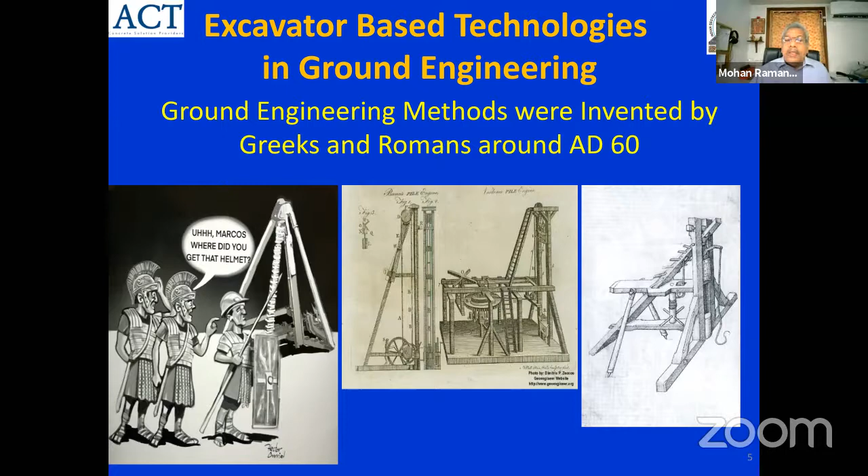You can go to Chelly's book, you can see some more pictures. So it's nothing new. What's new is the new manufacturing technology we can use to improve on this.

Now, what about India? Who are the equipment players in India? India has so many manufacturing brands, or at least representation brands, in 3 sectors. For students, earth-moving equipment is divided into 3 distinct segments, classified by the weight of the machine. One is called the mini segment, which includes mini excavators and skid steer loaders (SSL).

We have almost 20 manufacturers or brands working in India. Some are imported, some manufactured here. These brands are all part of today's Indian industry. Then there are backhoe loaders, generically called JCB, but the correct terminology is BHL - backhoe loader - made popular by the company JCB, though we know there are many other brands.

There are 12 brands of backhoe loaders as a choice, and at least 10 of them are manufactured in India. So India is the largest market in the world for backhoe loaders. Then come the excavators - we have so many brands of excavators in India.

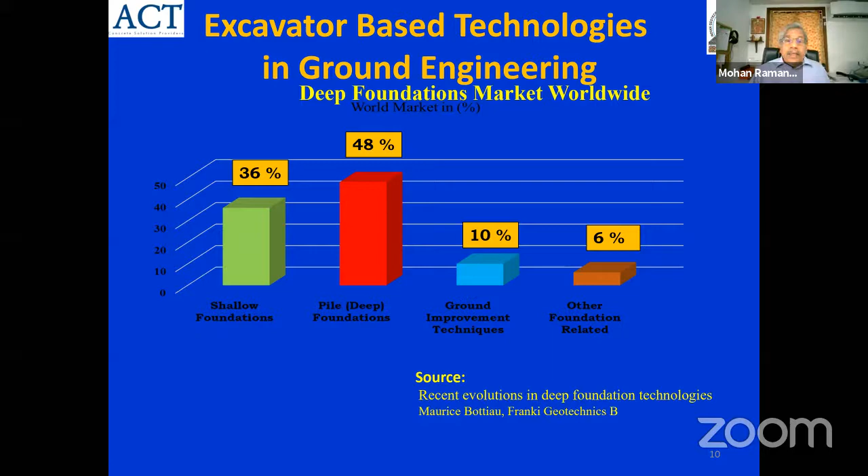This is data from a survey made by Maurice from Franki. So what about the Indian market? The Indian market in the coming years is huge. All of you know it's something like 5 trillion US dollars is going to be spent, and this is the breakup. Who's going to do it? Our contractors are going to do it.

And we need equipment - all of them start with the groundworks. There's enough jobs in the market coming up, but I don't think we have enough equipment or enough contractors. If we are not able to do it, projects will go on with or without Indian contractors and Indian equipment. This is the right time to pivot and change. This kind of data is available everywhere, and we should take advantage. The younger generation should take advantage and move into this.

Now, those of you who are not really in geotechnical engineering or soil mechanics - India is a very diverse country, and it gives us a challenge plus an opportunity to see a wide variety of soils in India. Without the basic knowledge of ground, I don't think manufacturers can succeed. So ground engineering profiles are available - we have enough knowledge in our universities and professors.

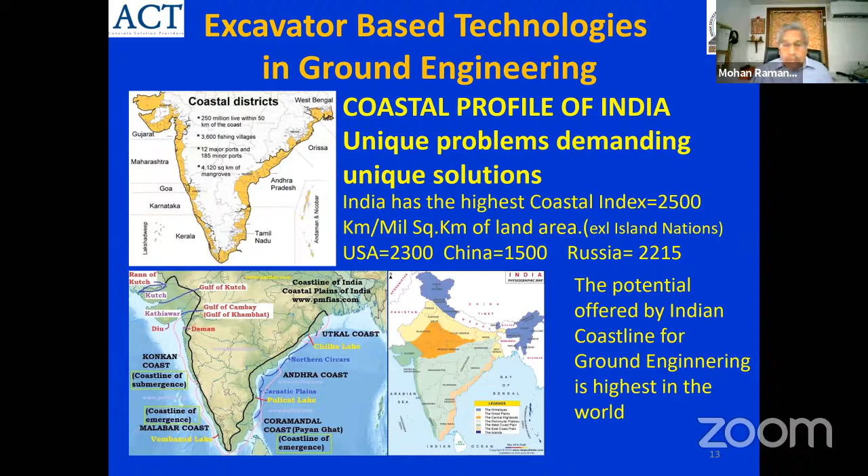So this is something unique. I thought I should bring this point, that the Indian coastal line gives us an enormous opportunity and a huge challenge. Of course, I'm not taking index small island nations like Singapore and so forth. I'm taking the large countries.

Now, with that background data, let's go into the simple to the most complicated equipment used. Pardon me for some basic knowledge, basic information, which most of you may know, but for students sponsored by the student chapter, they should know.

The most common and most prevalent use of an excavator is a bucket. A bucket is nothing but an attachment at the tip of the machine, which excavates with a downward force, and it takes the material out and loads it into a truck.

This is the most common, and excavators can range from 10 tons to 120 tons in weight. Similarly, the bucket has different capacities, maybe 5 to 6 cubic meters being the largest, and the weight depends on the density of the soil.

This is the most useful breakthrough we had about 25 years back when a company in India brought the first excavator.

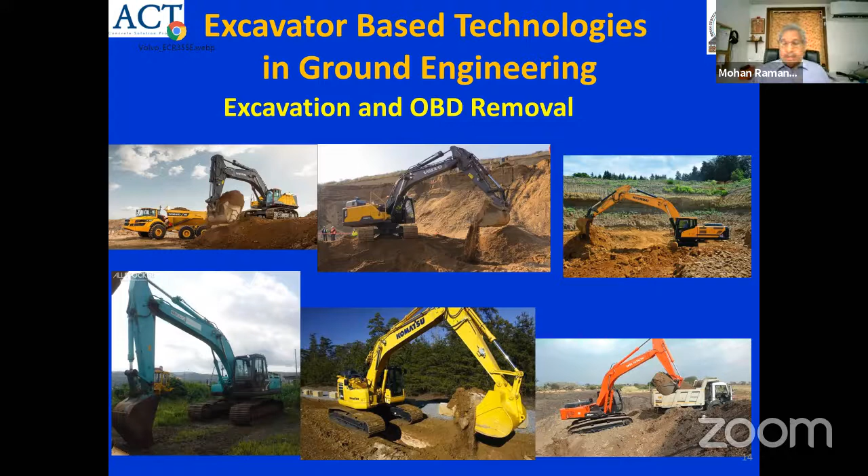Now, the same excavator is being used for different applications with a longer boom and a longer arm. This portion here is called the boom, and this portion here is called the arm.

With the longer boom and longer arm, and simple moment calculation based on the counterweight, we can arrive at the bucket size, and this is used for deeper digging. There are many applications, and these longer booms and arms are also imported, though a few companies in India are making them. It's a simple way to do it, but it's useful now for deeper excavations.

We're going for double basements, triple basements, so longer booms and longer arms have a great boom. We also have deep excavations in all our metro stations and our cities having car parks and malls. We see this kind of construction happening, and there's no way we can excavate into these pits without the excavators being lowered down.

We also use in deep excavations these kinds of small machines, 20-ton, 30-ton machines working in deep excavations. You will find them, but they get lowered through a ramp, and they're the most versatile machines.

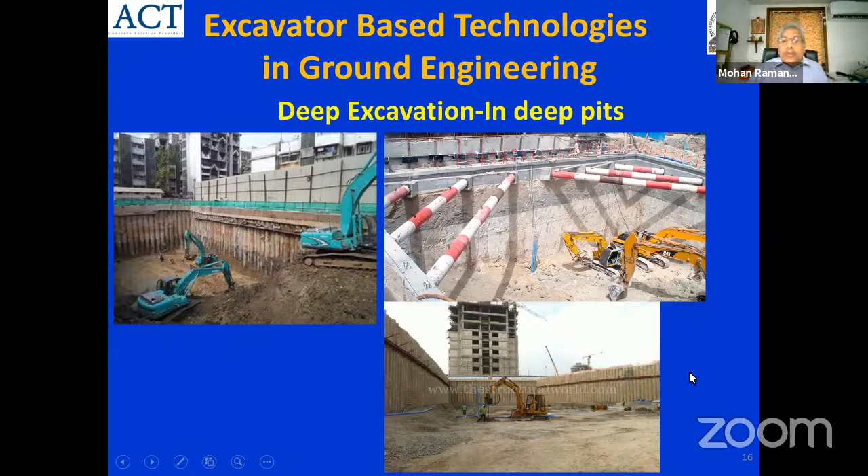Then we have another special equipment called the Tele Dipper. This Tele Dipper is now being introduced in metro stations for top-down construction. In this top-down construction, you build the top slab, leave an opening, and start excavating, going up to 30 meters or so depending on the station height, and you use this equipment for removing the muck.

These kinds of machines, all these pictures from India, the top three are pictures from India, and they are being used in metro stations. I have a short video, but I don't want to stop here because it takes some time to switch.

The video shows the operation of these machines. There is a telescopic dipper that goes inside, and there is a grab bucket which grabs the material. The telescope closes and the machine swings and brings it down.

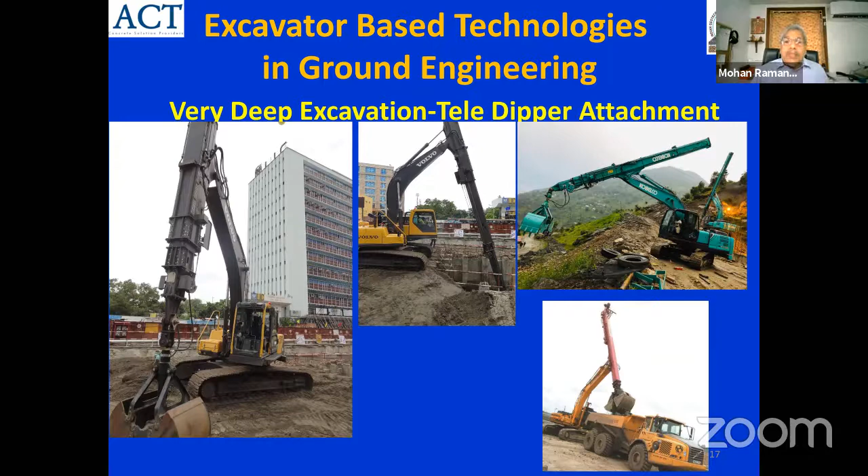This is a very simple equipment, and even this is not manufactured in India. That makes it expensive if you import and bring it to the site. But with the amount of metro work going on, these machines will find a great boom.

Then we also have simple attachments called trenching buckets. This is just the attachment. For those students, I'm talking about this kind of shaped attachment.

This shaped attachment gives the shape of canals, small drains, and ditches, which is used on the sides of roads, for agriculture, or for laying pipelines. It gives the shape and makes it easy so that you can just put a concrete lining or some sort of lining and close the ditch.

So even these simple things we don't see much in India.

Now we go to the next large chapter called ground improvement. Ground improvement comes when we have soil conditions such that your geotechnical consultant will say this is not fit because the soil is not good, so we have to do something to make it strong.

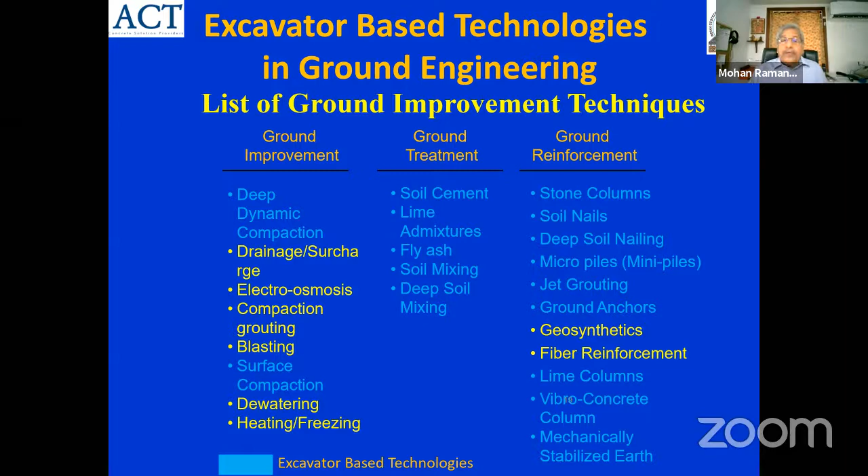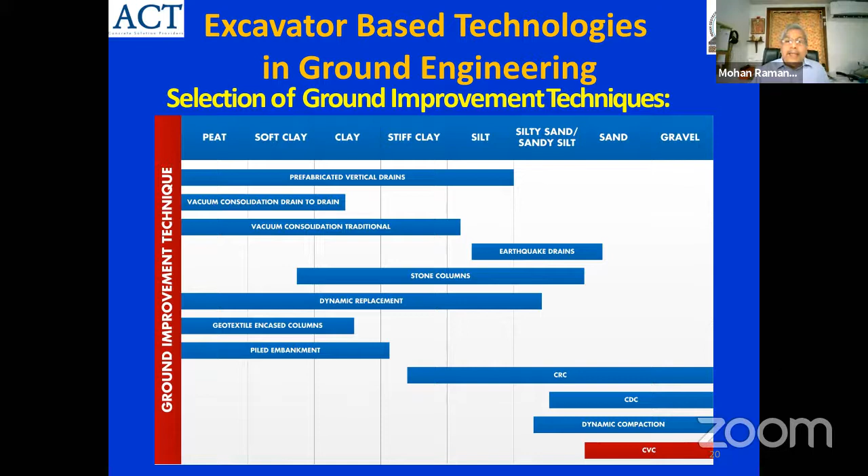This is a very famous chart, where it shows on the x-axis the types of soil by grain size, and then the various techniques and the range of techniques we can use. So this shows one technique cannot fit all. One technique, like PVD, prefabricated vertical drains, which is very popular for consolidation of soft clays, cannot be used when the particle size becomes large. There are other techniques you can look at. This is just a chart for the students and a guide for field contractors.

So if you put earthquake into this and ask which are the liquefaction potential areas, the most liquefiable soils come in the range between 1 mm and 0.001 mm, and it's sand and gravel. Also the moisture content, which is not shown here. So we also need to look at liquefaction potential and treat the soils accordingly.

More than 60% of the landmass in India has been declared as earthquake prone. The latest codes and microzonation happening say that more than 60% of the landmass in India is prone to earthquake. So we must take cognizance of this when we design for the future.

Now we come to the next simple attachments, how we do compaction. These are compaction using attachments like plates - we don't see this at all in our daily life. These are simple hydraulic plates, vibratory plates attached to an excavator. They work by taking the hydraulics from the base. Each excavator is called a hydraulic excavator, which has a hydraulic pump, and a separate line is brought into here and fitted onto this. There are a few manufacturers of this in India, but we need to make sure this is easily available - maybe a good rental company can do this.

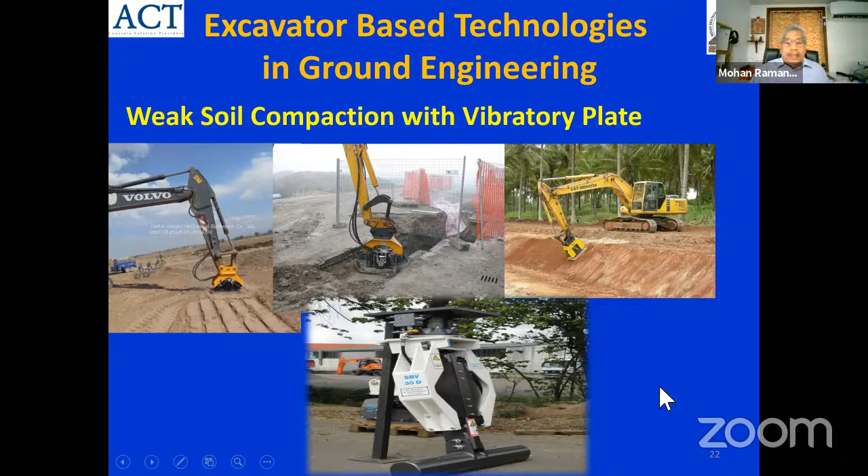We also have the same concept but as a roller - we can attach a vibratory roller. All of you have seen a roller on the road during road construction. If you drive through our highways you'll find the soil compactor and asphalt compactor, which is also a vibratory machine. But the same concept can be used on sloped canals. This has been used extensively in Gujarat during the Narmada Canal, but not very popular in other parts of India. These are very simple vibratory attachments made by Indian companies. There is a lot of innovation that can be done, and we are capable of doing it.

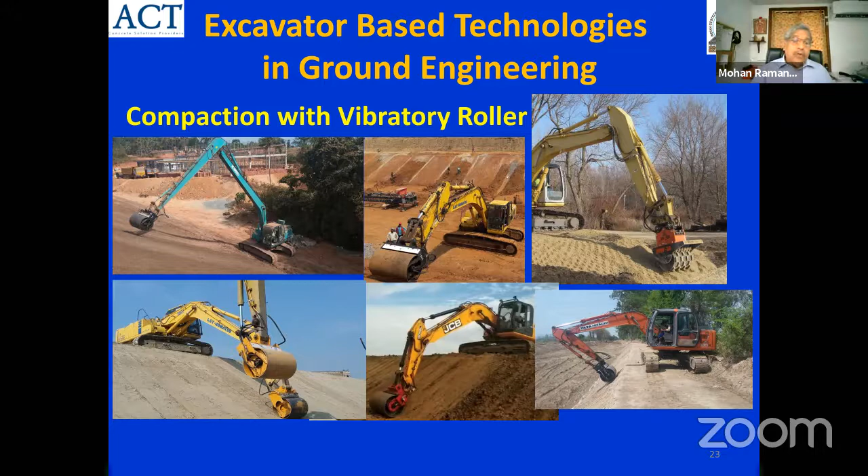These are used for compacting slopes - otherwise how would you compact the slope? Alternate methods are very cumbersome, and this is probably the fastest and cheapest method for slope compaction. As you all know, we've seen so many canals built by our government where the sides are not compacted - there is slope failure and the lining slips. We see this every day shown on newspapers. So it's very simple, and we should get into at least specifying this for our canals and ponds by using vibratory rollers.

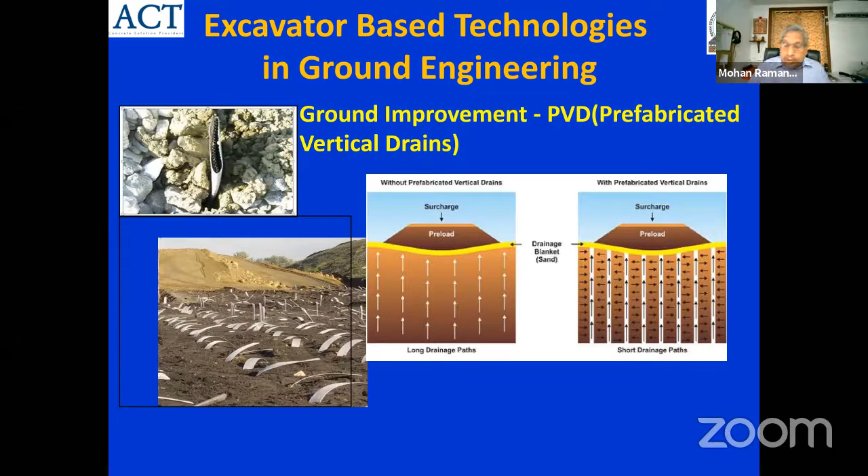It's a slow process. It's being used in large airfields and large areas where the area is very large. PVD is very commonly used in India and other places. So the PVD is explained more here.

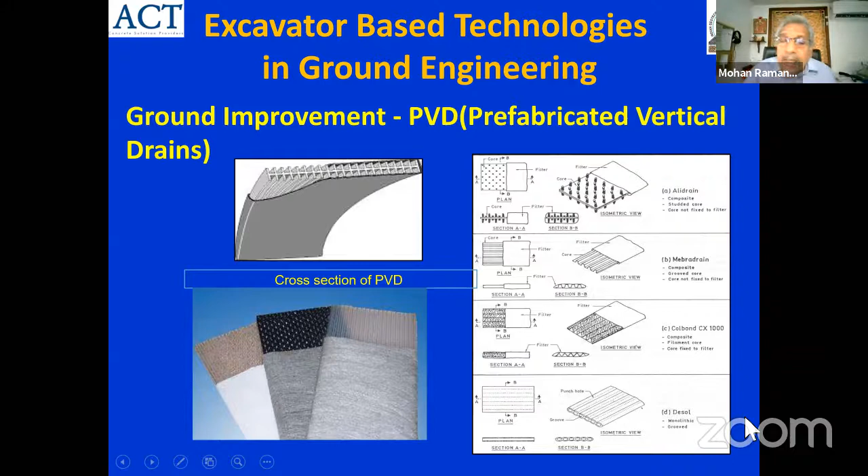It is just a cross section of a small band, which is about 100 or 150 mm wide. It has got a geotextile outside, and then it has got a pathway for water to come up. So it's a very simple system, but installed by machines like this.

As you realize, these are systems that are conceived in research institutes and laboratories, but out in the field you need equipment. Without the equipment, these technologies will stay in the universities.

The next method is Vibro flotation. Again, a ground improvement method is to introduce a vibrator - imagine a long vibrator, like a concrete vibrator. It's a long needle pushed into the ground - by itself it sinks, or with the assistance of water jetting - and then it is backfilled with a granular material like stones, or stones and boulders, or maybe 40mm to 100mm broken stone filled inside. This technique has been around in India for the last 25 years at least. We also have design methods for all of them.

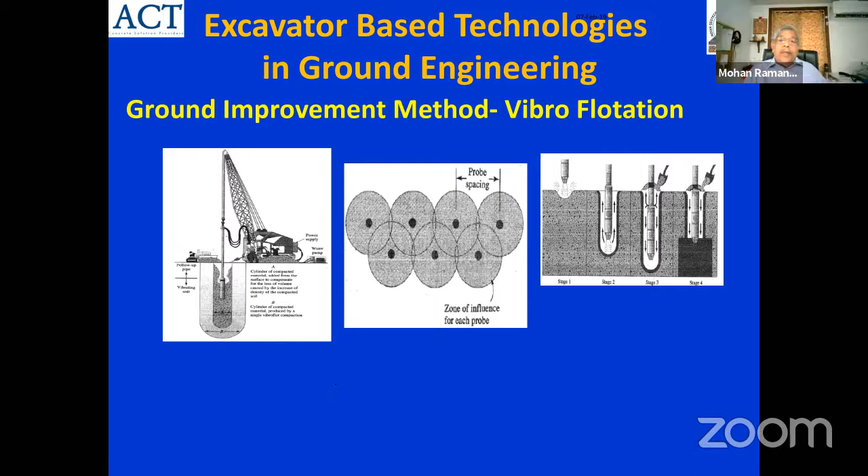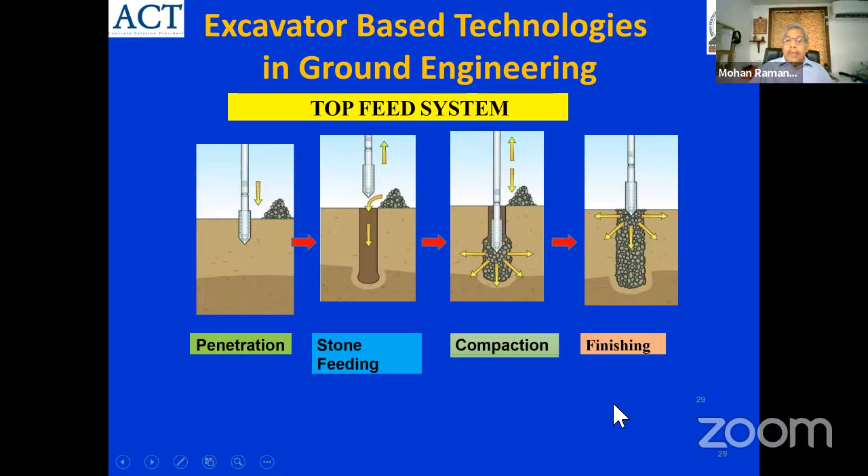You have two systems - one is the top feed, the other is the bottom feed. Top feed is where the material is kept on the side, the vibrator is pushed inside, and the material goes in there. There are a lot of seminars and webinars going on about the theory of this, but I'm just explaining the simple way how the stones are replacing the weak soils. It involves a hydraulic vibrator. The bottom feed uses the same system, similar concept, but you feed it from the bottom.

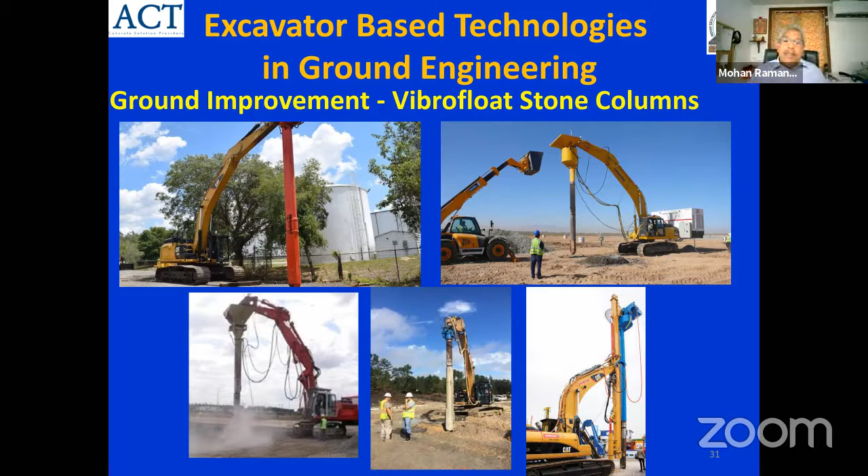There has been a lot of innovation in the same techniques in Western countries. This is a system from a company, Geopier, from the Western world. I borrowed these pictures, and you can see they combine the hammering instead of vibro. They use a hammer technology.

You hammer the pile and make the surroundings like a driven pile, and then fill it back with aggregates and so forth. They have a patented system of rammed aggregate. So for hard topsoil, it's augured, then hammered, and then backfilled with granular material. All these variations are smaller stone columns.

And where do you use them? You can use them in so many locations in India, and very aptly. It's also being used to strengthen railways.

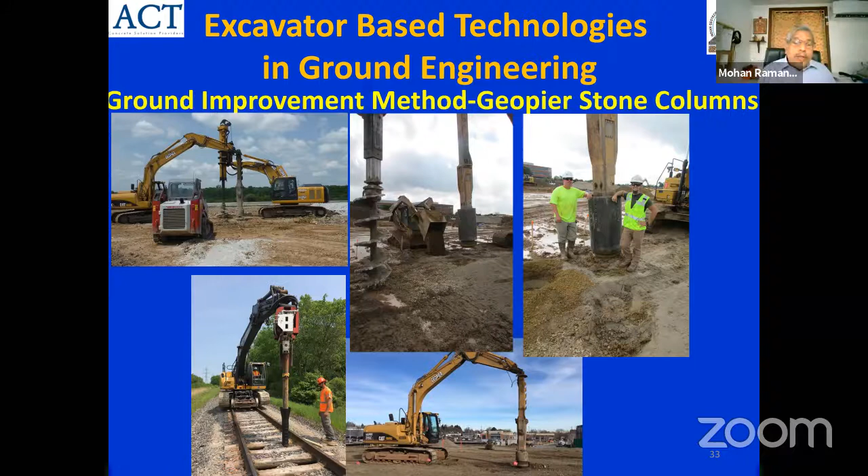For railways, this is a picture from Germany, where between the sleepers they are doing the same stone columns, the Geopier columns.

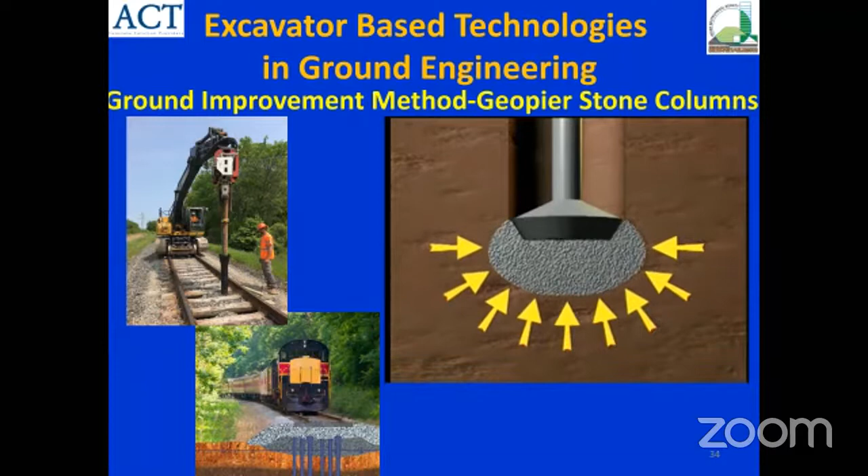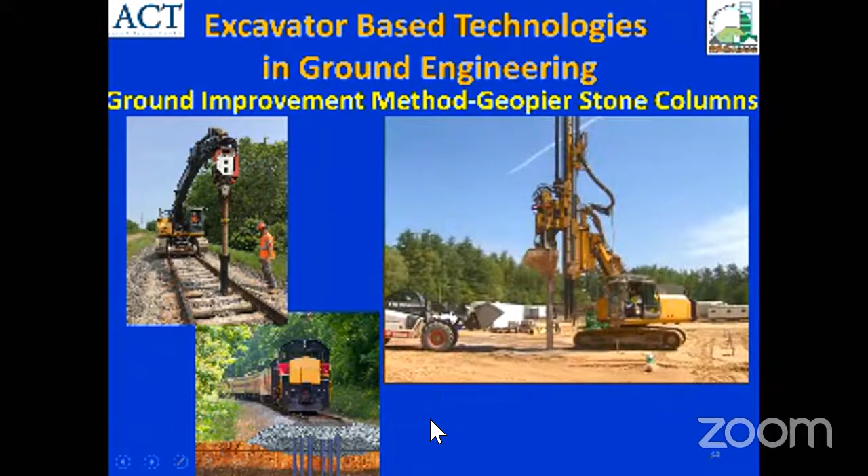This pre-stresses and pre-strains the aggregate at the bottom of the cavity while forming a bottom bulb. Then, thin lifts are incrementally placed and rammed until the pier is constructed. The result is superior strength and stiffness. For sites with soils that are unstable during drilling or with soils that are contaminated, Geopier Foundation Company has developed the Impact System, another proprietary and patented rammed aggregate pier method. The Impact System is cost-effective for installations in soils subject to caving, like saturated sand. The key to... I will stop here.

Just to give you an idea of that, these all use a hydraulic hammer. This hydraulic hammer is the same hammer that we call a hydraulic breaker. We sell close to 5,000 of these units every year in India itself, but it goes to a different type of segment. The same hammer is used in the geotechnical field.

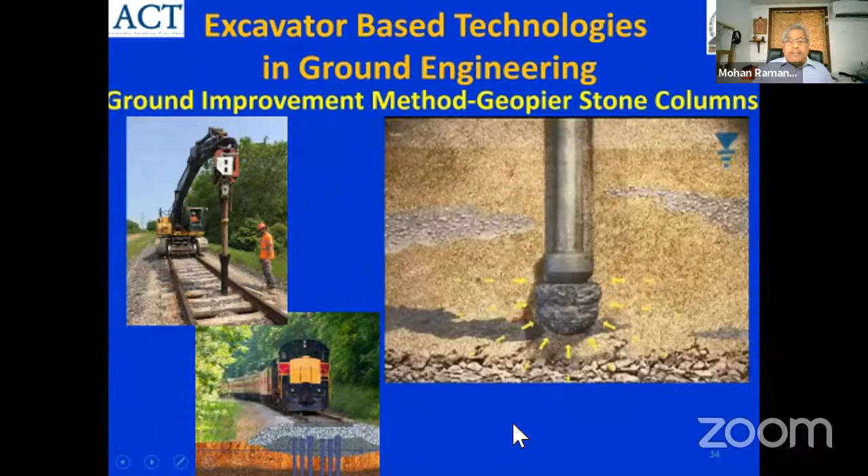So what you see on the left here is the strengthening with stone columns of an existing railway line. So it is only for the designers to innovate.

Here I borrowed this from Huesker, Germany. These slides, this is also ground improvement. They call it the Ring Trac geotextile encased stone columns. So this is exactly the same as what I told you earlier, but the whole thing is encased in a sock type of material, if I may.

So a geotextile tube, a tube of this size, large size, is installed by machines. It is drilled, vibrated into the ground by a vibrator, a pipe with a closed end, and then the sock or geotextile tube is introduced, filled with sand, and withdrawn. This is for extremely soft clays.

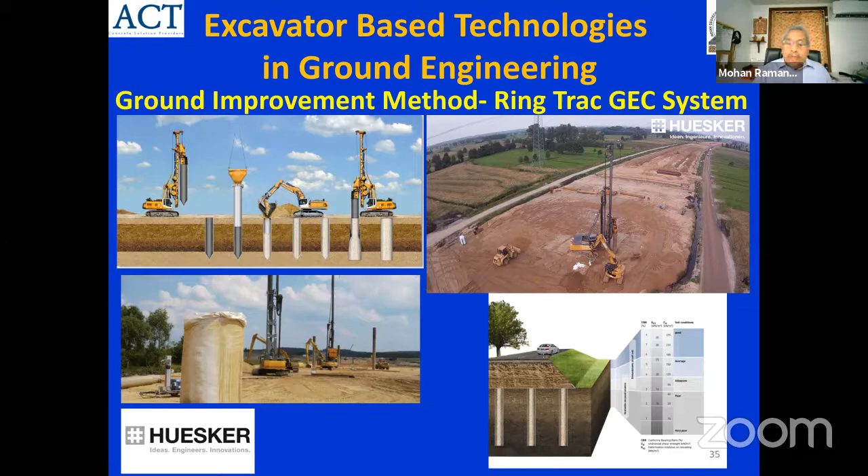I acknowledge the slides from Huesker, and these are extremely soft clays that are very, very soft. You can see the unconfined strengths are extremely low on the right side. This is another system being used for, and can be used in, very soft soils. This is the Huesker method where, as I told you, a tube with the bottom closed is vibrated in with a vibratory hammer, and once it reaches the ground level, it is filled with a sock type of geotextile tube and filled with sand.

The next method is shallow soil mixing. Soil mixing is another method of ground improvement where clays or weak soils can be strengthened by addition of a suitable third material—it could be cement, lime, specialized chemicals, and so forth. This has gained a lot of importance in the world, and deep soil mixing and shallow soil mixing are being used for treating soils which are weak and would have originally been rejected as a favorable site.

How can they be used? They can be used in blocks or grids, or made into walls for temporary excavation, or load-bearing columns. Today we have standards which can be adopted, and the Western world has started using this, but in India we don't see much of it. The same methodology and principles can be used for contaminated soils.

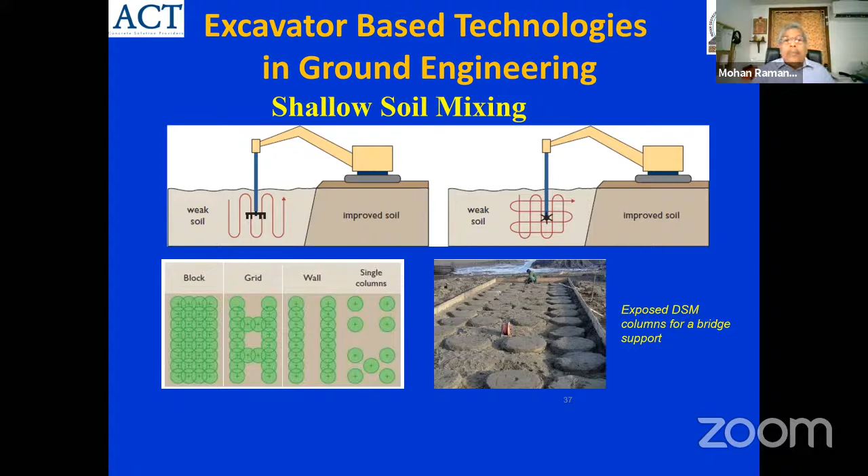So for shallow soil mixing, use an excavator. The whole mass is mixed—it can be mixed dry or wet. It's a very cost-effective solution. When I say shallow, we can go up to 3 to 5 meters, or 5 to 7 meters. Then we go to deep mixing.

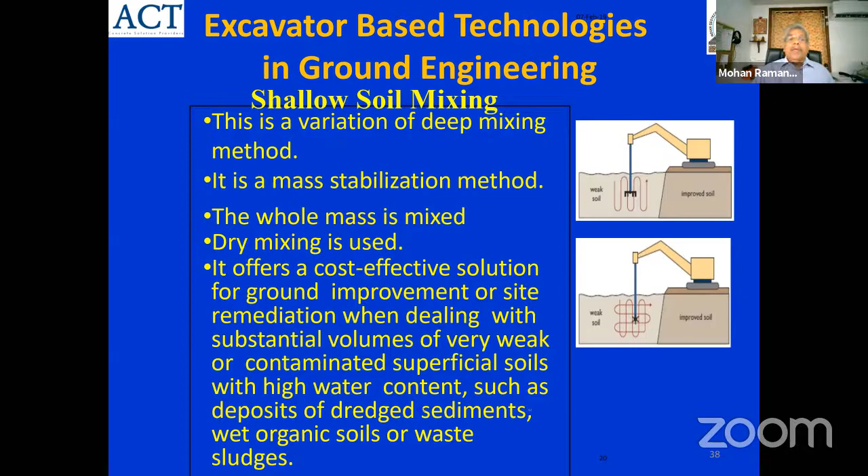Shallow soil mixing is made with excavators, and you have a plant which can pump from the bottom down, with special mixing methods. One of the easiest ways to mix the chemicals or cement is using excavator-based drum cutters. These drum cutters use a special type of blade for proper mixing below the ground. So here's a short video.

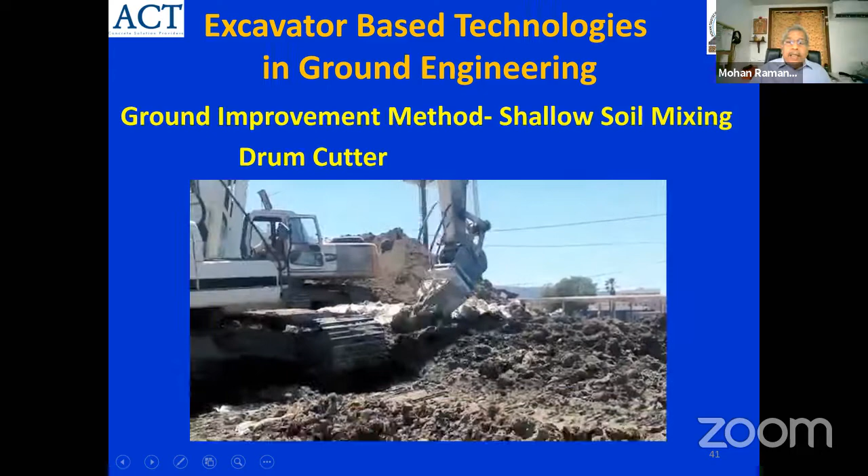You see here the shallow mixing—the machine is used with an attachment called a drum cutter, and then the whole area is rolled with a vibratory compactor.

You can also go for specialized systems. There's a company called Allu in Finland with a system called specialized mixing—they have a whole train of pressurized dry mixing. The question is, if you change the moisture content of already soft clays, you're weakening the soil. So this company has dry mixing with a pressurized chamber, and the mix is pushed into the ground.

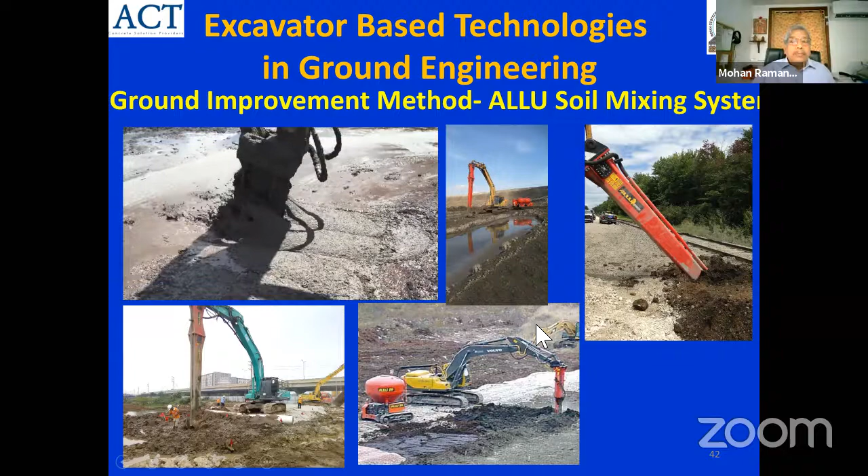As you can see, this is being done even under railway lines, on a working railway line. This is very, very common in Europe, not popular in India, but soil mixing is going to be a future of India.

Next is deep soil mixing. So we talked about shallow soil mixing—now for deep mixing, again excavator-based machines are used. These excavators are slightly modified for stability from a standard machine. When we say deep, we don't go very deep—there are specialized machines for that. We can go up to 20 meters with the standard machines.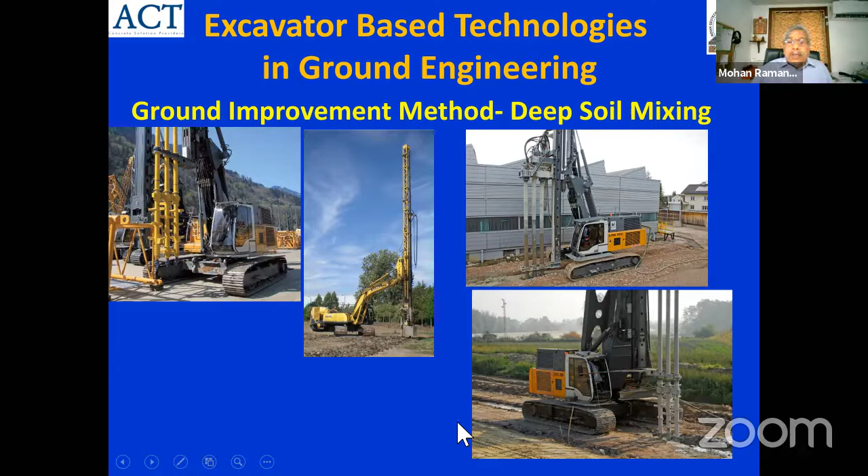We have this kind of mixing probe where it's hydraulically pushed into the ground, with mixing paddles, ejector and holes, and the slurry is pumped inside. There are so many applications of this: temporary walls, strengthening of soils, and so forth.

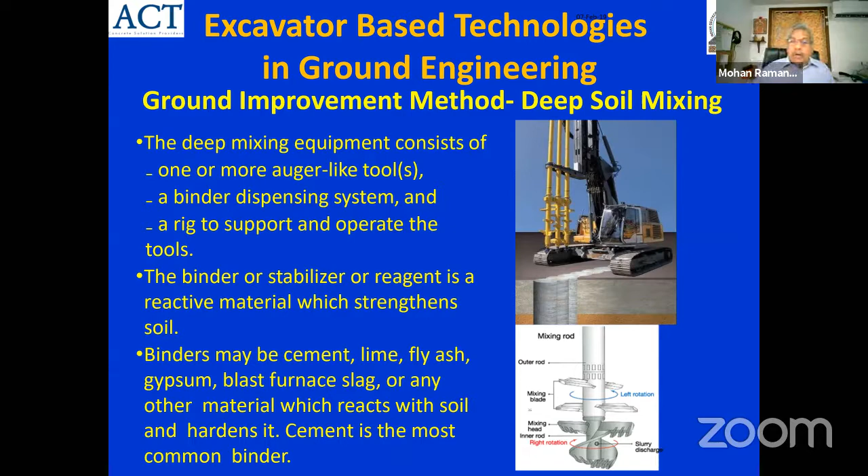The principle of deep soil mixing is quite clear. You make a series of penetrations, and while the auger is rotating, the mix is pumped inside, and the auger is withdrawn—it mixes with the soil and makes a column, a stronger material. These columns look like this when excavated. They are load-bearing columns—I borrowed this example from Howard Baker.

So you can build soil cement retaining walls this way. You don't have to build very strong piles—you can make these walls instead. You can design these walls as load-bearing columns and embankment support piles.

In the excavator, they look like this—this is a trench cutter attachment. It's a much bigger machine, but you can see the kind of columns being built with soil cement.

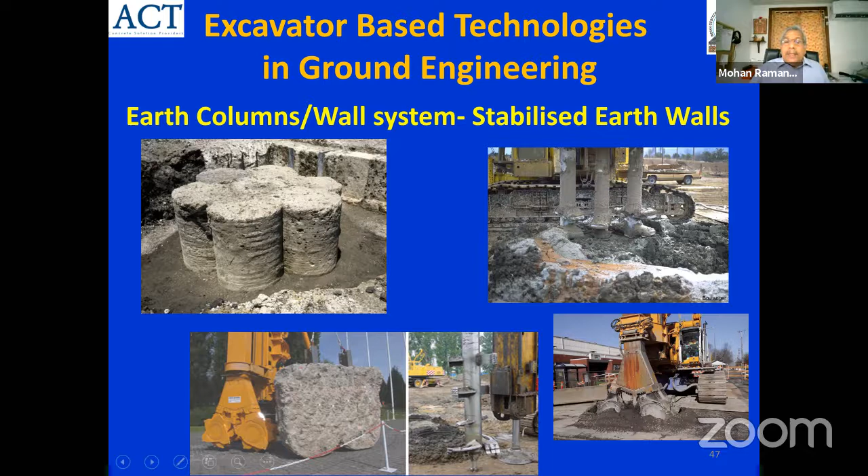Sand piles are very commonly used, either for load bearing or for drainage in soft clays, and this can be done in many ways. You can use a driven piling system with a sacrificial shoe, and the pipe is withdrawn after filling with sand. Introducing sand piles has been done for a long time.

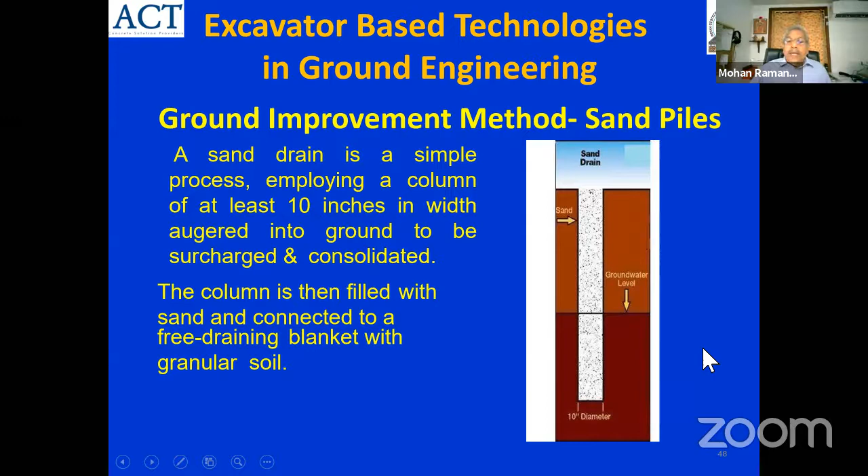Again you use this machine—this is one of the latest things I have found out. This company in New Zealand is driving timber piles into very, very soft clays. These timber piles are driven by a vibratory hammer system, driven into extremely soft clays, and they consolidate. The theory is it also replaces the PVD drain—the time required for consolidation during PVD—because the piles themselves act as a load-bearing member. This is one of the latest things I've learned recently.

Now let's come to another system where India is totally missing out. If a common man wants to drill a hole in the ground, we do not have the right equipment.

I call it the Indian jugaad, because these equipments are not meant for this. They're not sold as drilling equipment, but they're used as drilling equipment in a very innovative way. There are companies in India which make it. The problem of drilling holes, whether it's a 150 mm or a 1 meter diameter hole, is a job for hydraulic equipment.

Here, this is using the PTO of a tractor. Nothing wrong with it, but how deep can you go with this kind of equipment? This is used in a very good way for crash barriers. I'm calling it the Indian jugaad because you don't see much of this in Western countries.

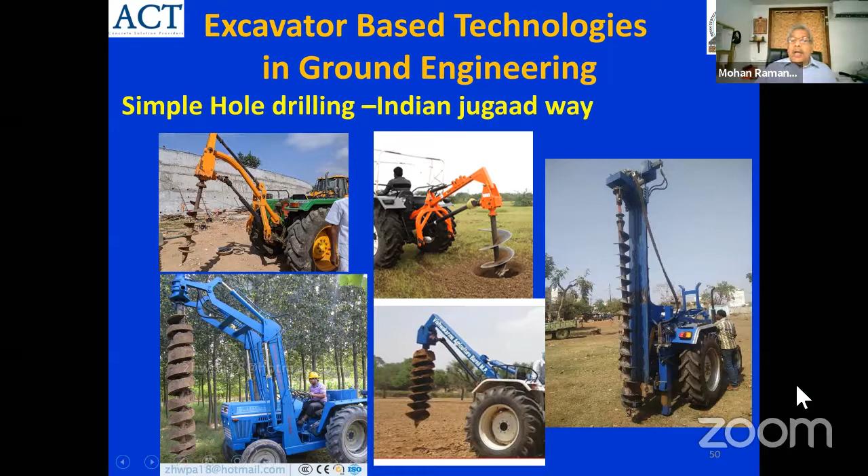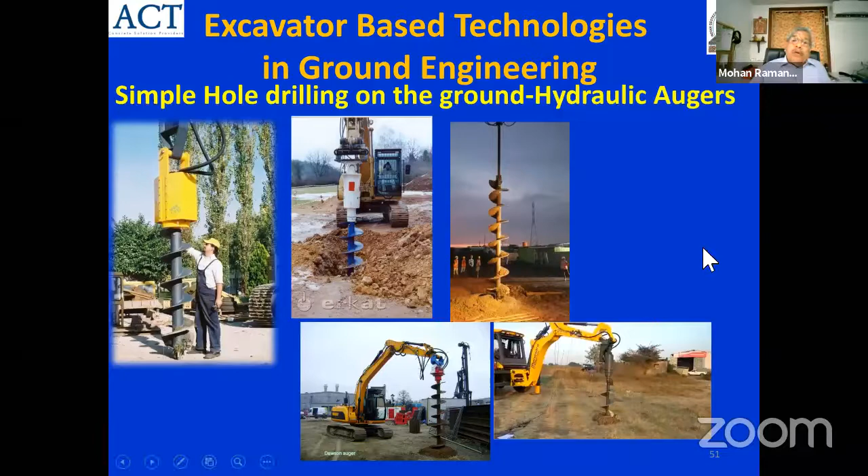What you need is a hydraulic drilling auger like this, which can be used with a backhoe loader. Here you see with a backhoe loader, a hydraulic auger is a very simple way to drill holes up to very large sizes. It all depends on the torque, which depends on the motor inside and the hydraulic power of the machine. This is a very good way to give our public a way to drill holes using a hydraulic auger drive, as we call it.

It can also drill through rock. This is from Qatar, where it drilled through very hard rock by changing the bit, using the same system.

Now we come to one of my favorite topics, under-ream piles. Those of you who can recognize, it's Professor Dinesh Mohan, who was the director of CBRI, who I would say invented this piling system for India way back in the 70s.

He did what today's academicians don't do. He invented the system applicable for the black cotton soils of India, and he also devised a simple equipment to execute it, setting up a company in Roorkee, where CBRI is located, to distribute it across the country. He brought out this handbook from CBRI, which I still have, which became the Indian code, IS 2911, at a later date.

This is the complete journey I owe to this man, and my BTech thesis was on under-ream piles in '76. I really honor a person like this from academia, bringing this to the field and making the right equipment, converting it to a code of practice.

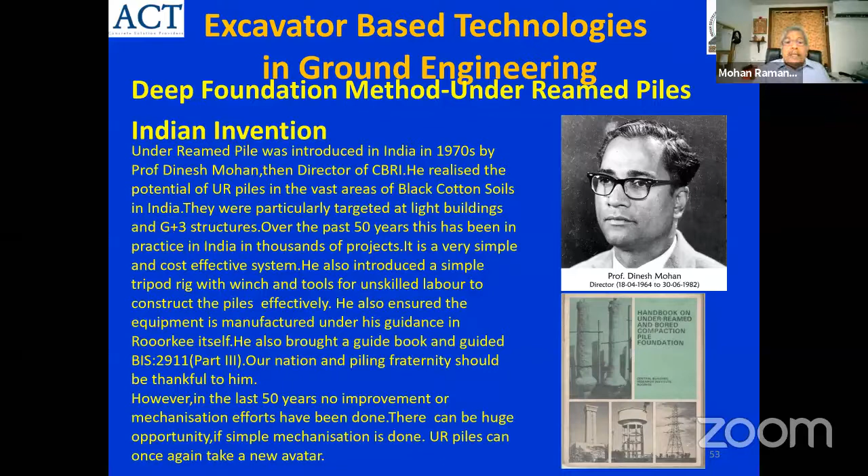Today it's used across India, but the problem is it was done 50 years ago and there was no mechanization. This is what Professor Dinesh Mohan invented - I use the word invented because nobody else did it before. This is a highly labor intensive method, a simple tripod rig, but even today there are thousands of contractors across India using the same system.

My question to the manufacturers is why this has not been mechanized, and why this 50-year-old equipment is still being used. Sometimes we feel ashamed - I feel ashamed to show these pictures in international conferences. But are there solutions? Yes, there are solutions.

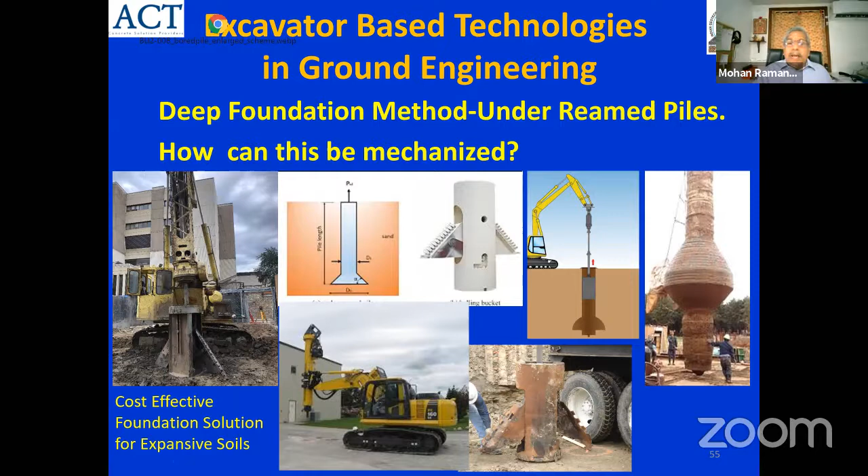These kinds of small equipment with augers can go down and up, along with the belling tool. Everything is possible - the connect has just not happened. You can see the diameter of this under-ream pile, more than 1 meter diameter, with a bulb of more than 2.5 meters and a length of 9 meters. Under-ream piles can fantastically replace so many types of piles in India, especially in the black cotton soils and expansive soils in our country.

We need mechanization. This is an innovation done in China for a similar type of equipment, completely hydraulic. This equipment uses hydraulics to make the bulb. Such systems should come into India in a large way on base machines, 20-ton machines.

Now we go to the next method, the drop hammer. We have been using piling hammers for a very long time in India. It started with Hiley's formula of drop hammers, and we still have a lot of driven piling being done, though the testing and design methods have changed.

But why don't we have small drop hammers on the most popular weight class, which is 20-ton excavators? These are very simple attachments that can be made in India, and we can go for short piles up to 10 meters using drop hammers. You can also go for precast piles using drop hammers. These are all things that can be easily done from our equipment point of view.

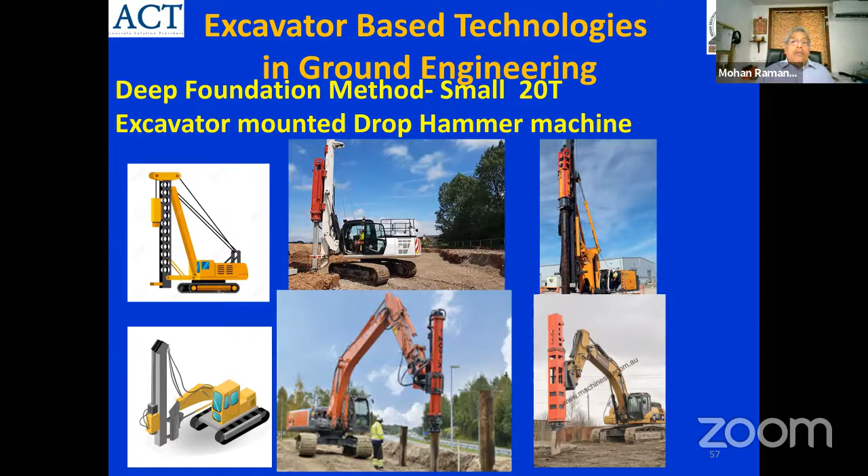Then we have the excavator-mounted excavator hammers driving pipe piles and sheet piles. We don't see much of this either, but it's a very simple way this can be done.

Then we have another equipment called the low headroom rig. Sometimes we need equipment which has low headroom to work inside a building, under a railway line, under a power line, and so forth. So there are low headroom piling rigs also in the market.

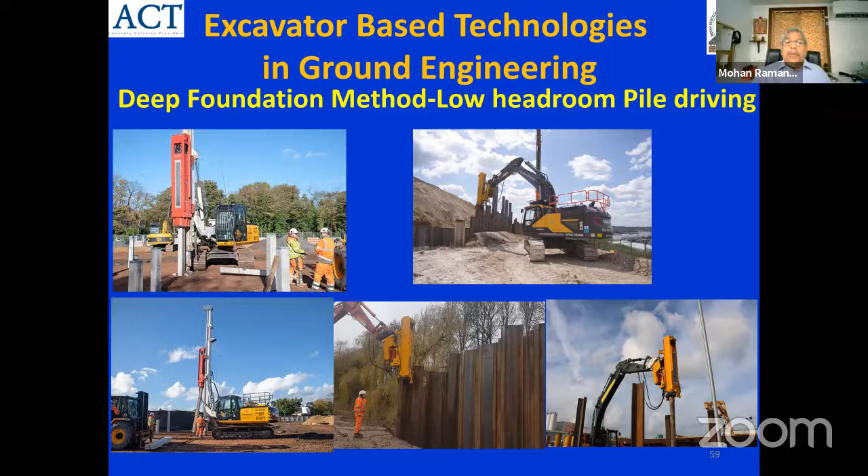This is another very innovative method which is not available in India: the use of a standard hydraulic breaker. I showed you one earlier. There's another method where the standard hydraulic breaker is being used to drive piles, steel pipe piles. Everybody knows a standard hydraulic breaker. I told you we sell about 5,000 a year, and this can be used.

It's a very simple innovation and very easy to do. As you see, it's being done inside a factory. So this is one of the low headroom technologies, very simple to adapt.

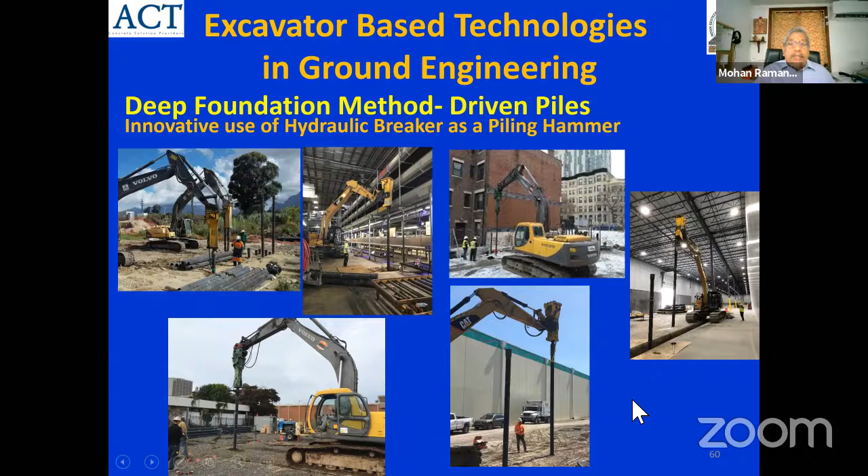Again, low headroom pile driving hammers. These hammers are imported, so we should start making them on very small equipment. The equipment size can be even 7-8 tons to drive these piles.

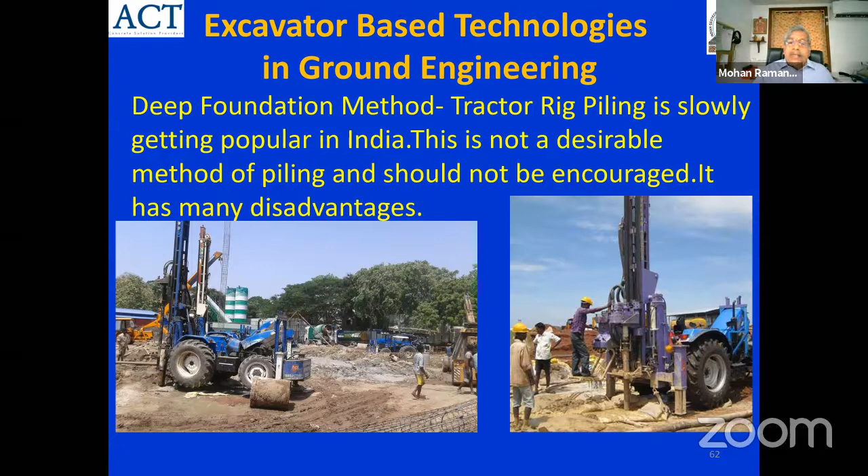Because we don't have these small piling equipment, in my opinion, we have to go for very large piling machines, hydraulic piling rigs. We have got a new class of machines called tractor piling rigs, which are proving detrimental to the industry. Many jobs recently - my colleagues in the deep foundation industry know about this - are failing because they have extended water well boring rigs into piling. This should stop, and in my opinion there is no IS code allowing this either.

So you will have this kind of intrusion into the deep foundation industry. Another method is called the CFA, or auger piles, or continuous flight augers. These are long screws, screw piles, that go into the ground, and then concrete is pumped inside and withdrawn. The method of driving the screw inside could be a hydraulic motor, or it could use a small mast here.

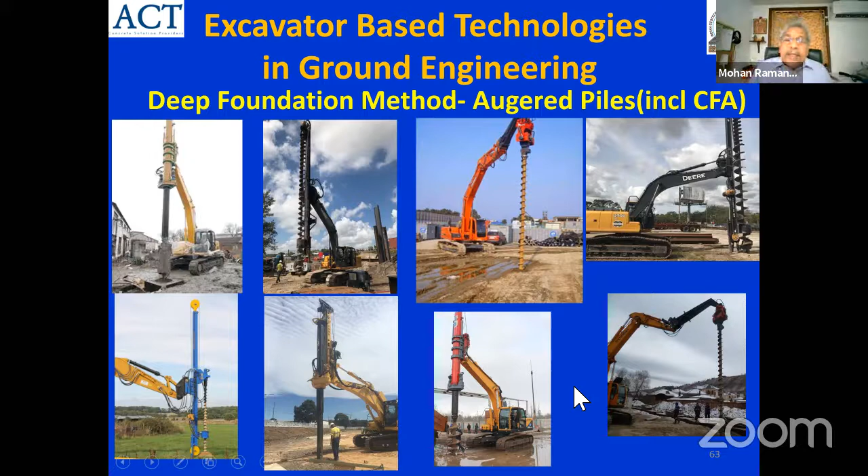With a leader - we call it a leader - all these are attachments to make the spiral hole inside, and concrete is pumped into it while it is withdrawn. CFA has just made an entry into India, and this has a great future.

Now we go into a sector where micropiles, mini piles, and soil nailing - these are all attachments to excavators or backhoe loaders. All this is possible provided we recognize that these are simple attachments that can be made by our industry. The main problem is the industry doesn't know the demand and the specifications of what we want. So this company, for example, in the US, TEI, makes only attachments for the mini piling, soil nailing, micropiling industry.

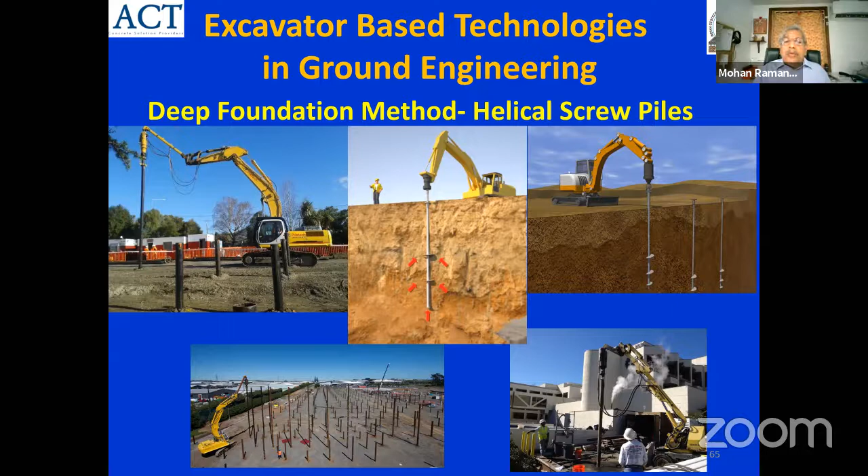The next is helical screw piles. It's another favorite subject of mine - introducing metal screw piles in the ground and leaving them in place permanently. There are so many advantages, and it is yet to come into the country. I'm trying to spearhead this entry through DFI. So helical screw piles are long metal screws that are set in the ground using hydraulic drive.

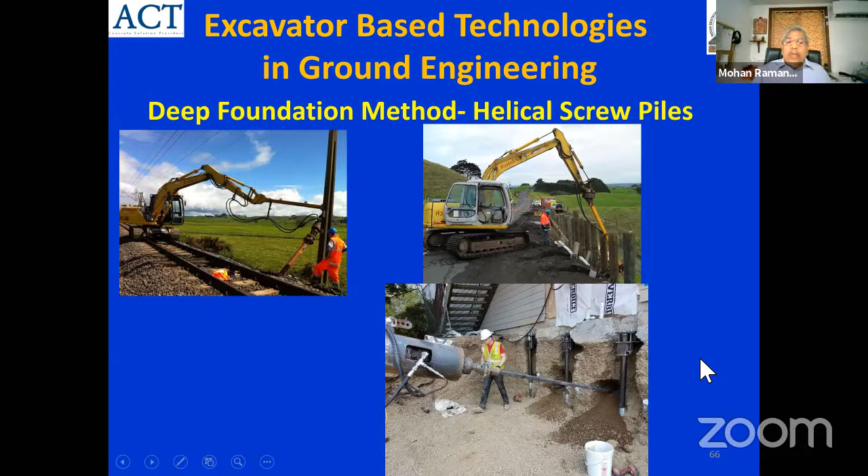Helical screw piles can be used for retrofitting on a sinking building. They can be used under a railway line for strengthening, or for a pole. There are so many uses we can find in existing situations. I have a short video of helical screw piles, not run, just for people who don't know the concept.

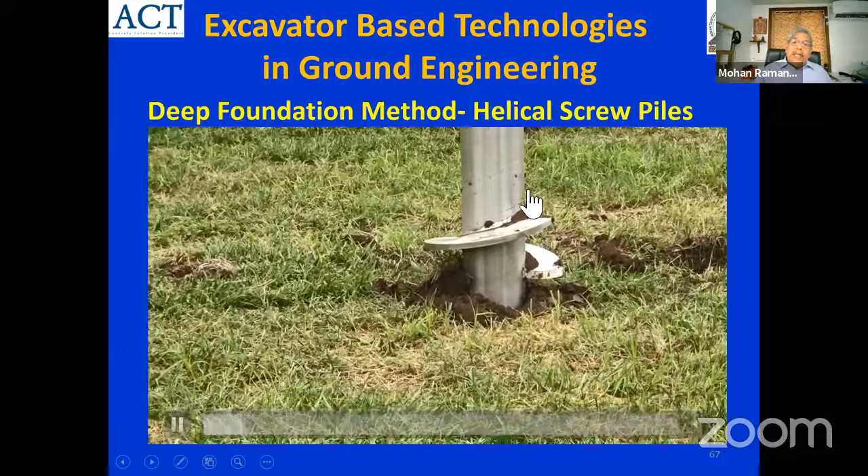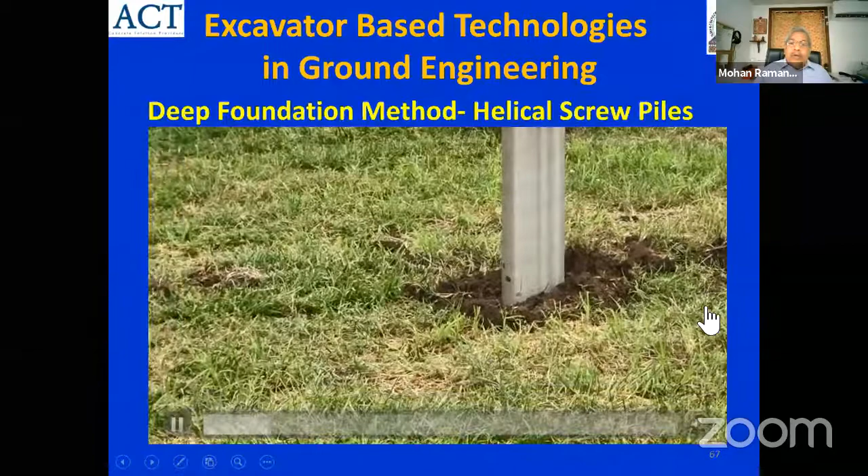As you're installing here - what you see is a 6-inch or 150 mm diameter helical screw pile being driven into the ground. The concept is the metal section is left into the ground, and this becomes the load-bearing pile. With helical screw piles, you see no spoil comes out of the ground. The design methods are available, and there are manufacturers doing it.

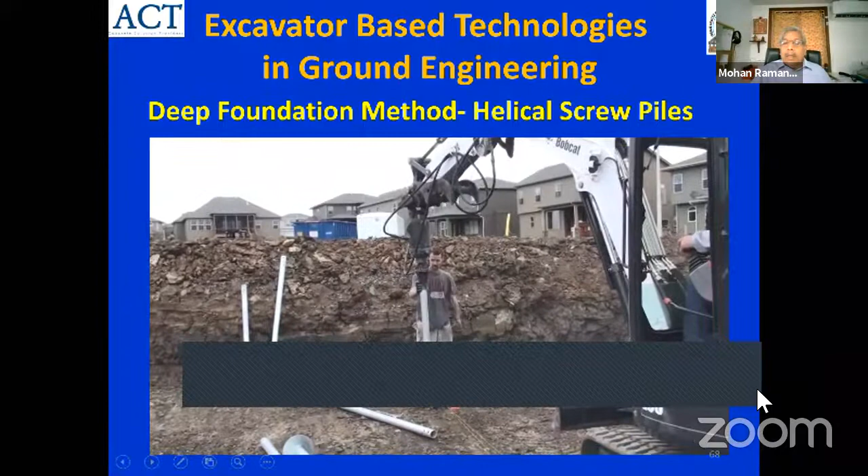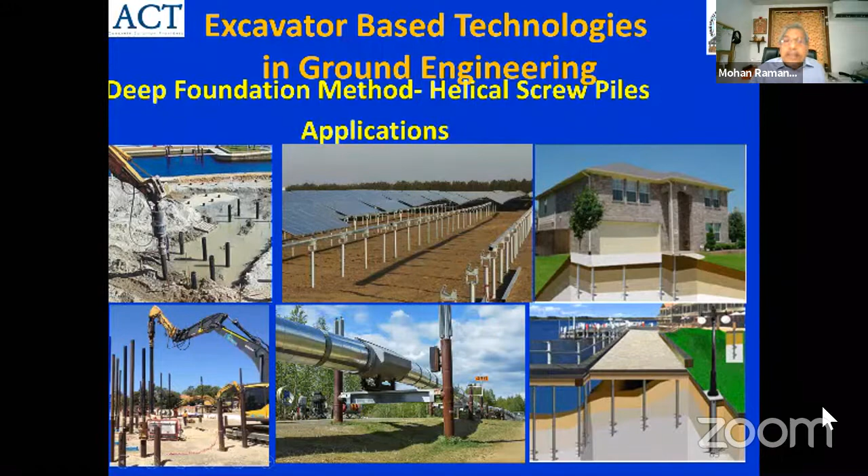Helical screw piles have enormous usage; the segments of use could be very large. A few I've shown here. Solar is one of the best applications, for solar panels. India is launching into solar, building retrofit, pipeline work, building foundations, and boardwalks. So many places we can use helical screw piles.

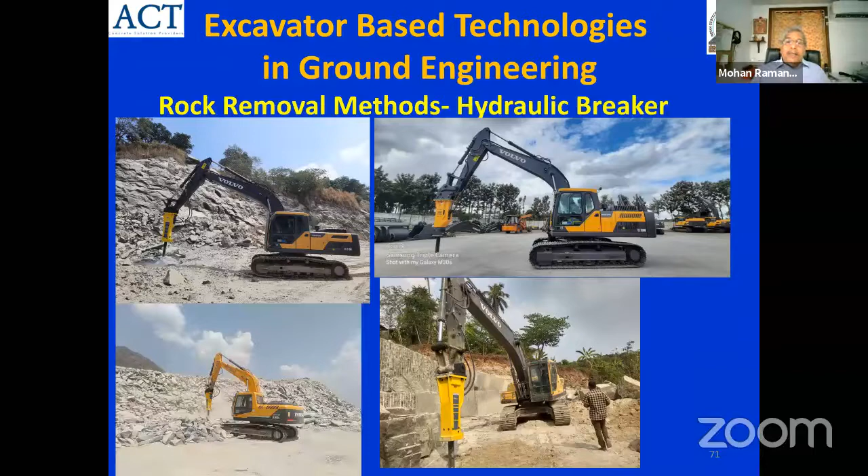The most common attachment comes to rock breaking methods. Now I'm going to discuss rock removal methods. I won't dwell so much on it since all of you know about this: the hydraulic breaker, which is the most common attachment in India for quarries and mines.

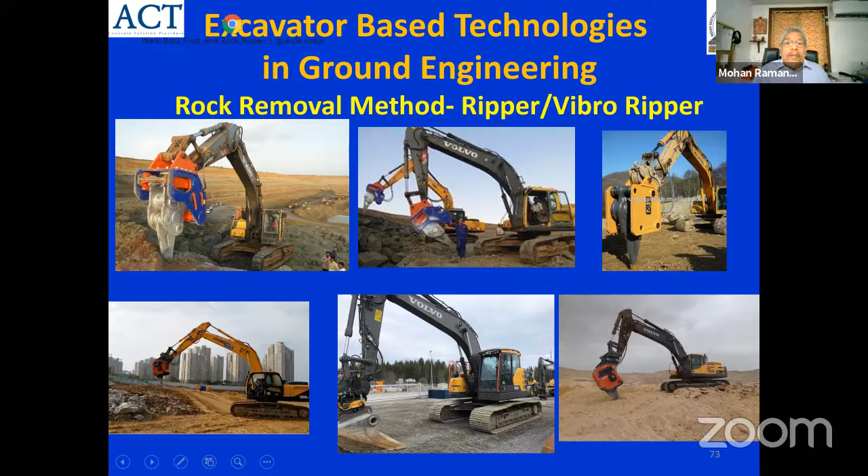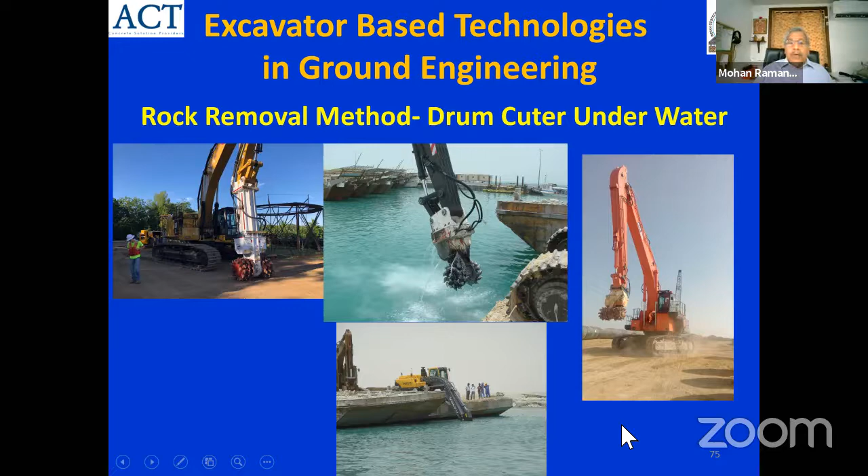The same concept can be used underwater, and this has been used in India. I'm proud to say one of the attachments is made by an Indian company with an imported trenching attachment. This can be used for underwater trenching of canals, deepening canals in ports, and other underwater works. These are off the coast of Gujarat, showing underwater trenching for a pipeline.

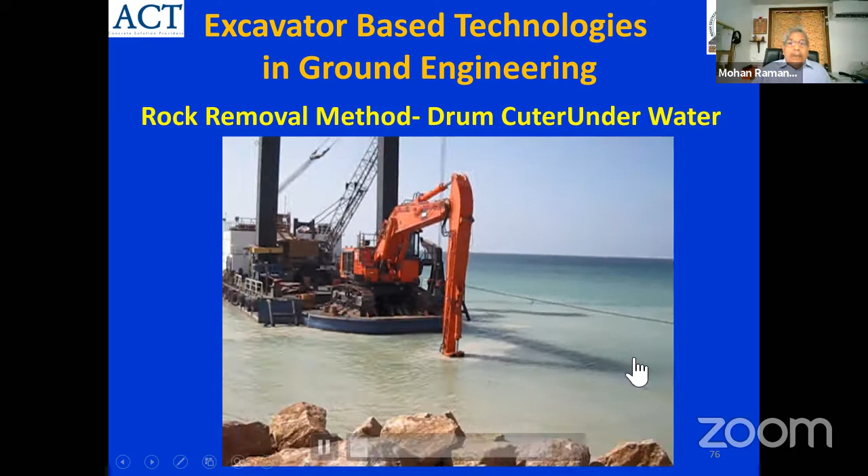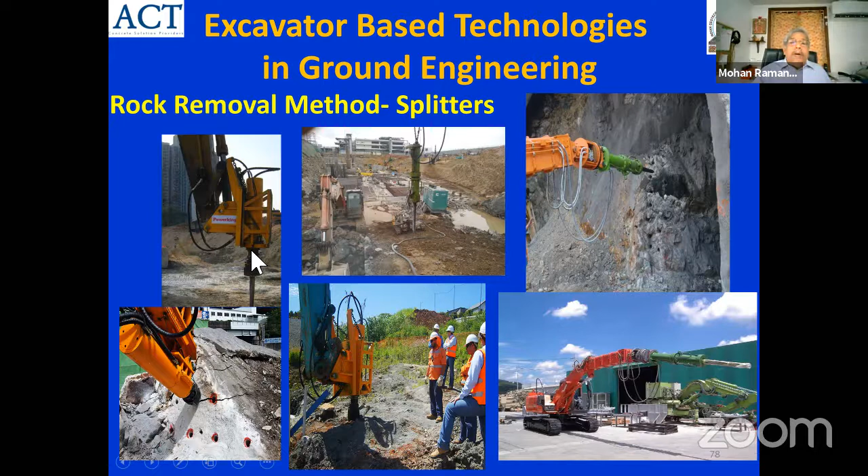Then we have machines that are splitting the rock in tunneling. This equipment is at Chennai Airport, where rock is being removed in the expansion using a rock splitter. This kind of specialized rock splitter is also being used in tunneling in India. This machine has been used in the Bangalore Metro. So these are all using the power of excavator hydraulics.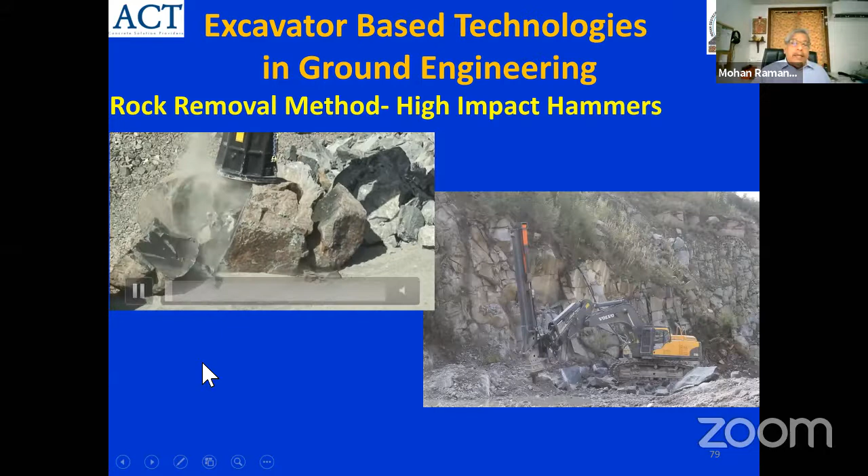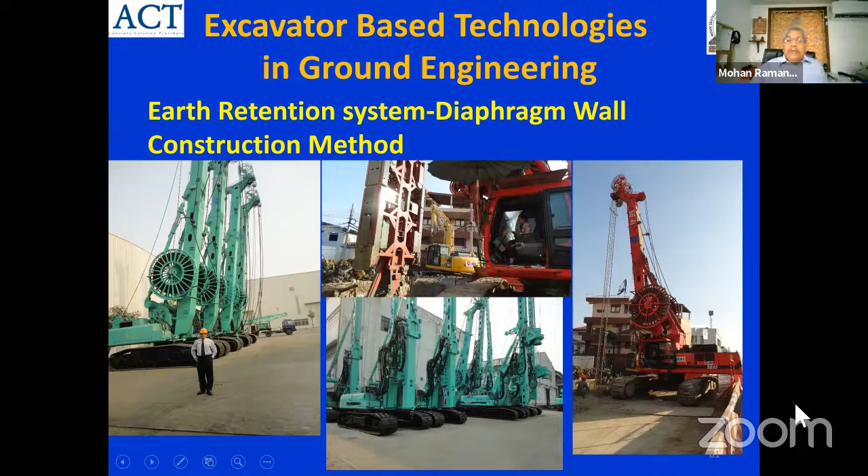Then we come to diaphragm wall construction, now getting very popular because of the metro rail projects, and these are all base equipment modified to have the diaphragm walling attachment. Right now we are importing all these machines at great expense, and it pushes up the cost of the work.

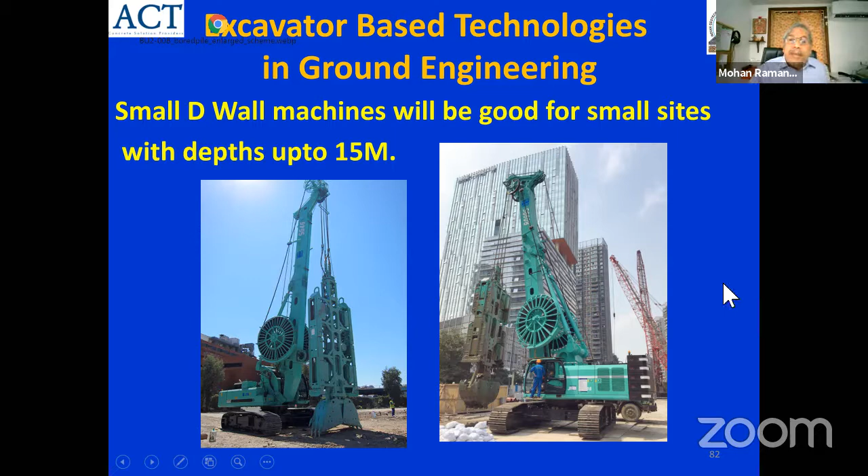So this is a small diaphragm walling machine for a grab, with a diaphragm walling grab, rope operated, up to 15 meters. We have basements coming up, and we can use these small machines.

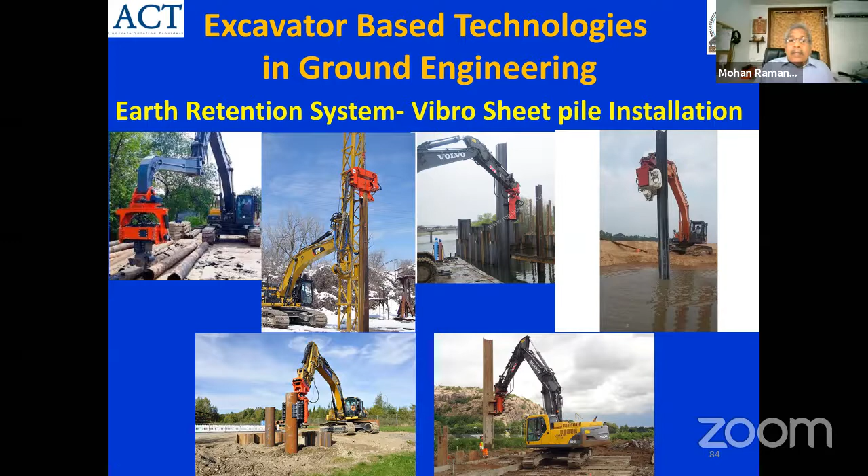So many of these attachments are possible, but unfortunately we don't have manufacturers of this in India. With the expansion of the metros, there will be huge demand for excavators as well as attachments.

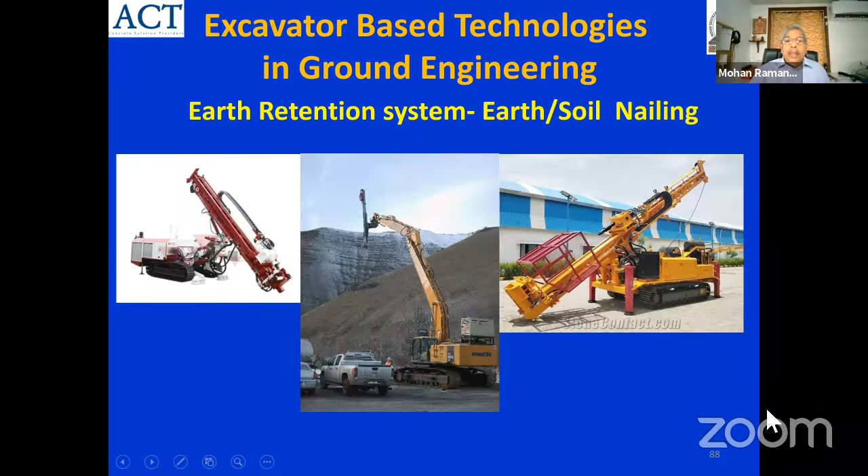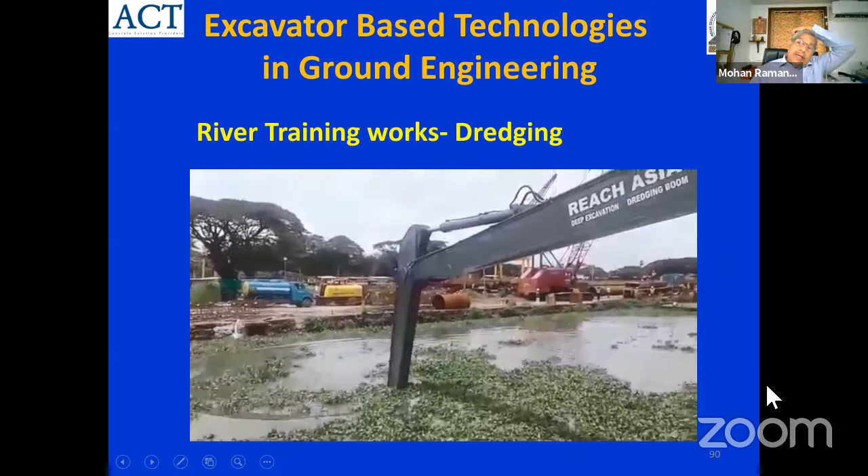A short video from Cochin, from one of our customers. What they are doing is dredging the riverway and removing the muck using a bucket.

Just to show you that this long boom, long arm machine was made in India by an Indian contractor. But these are special machines today.

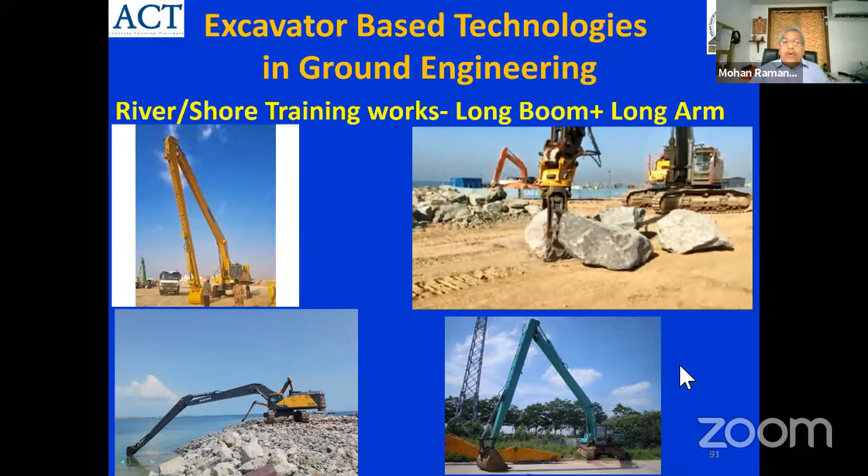These long boom, long arm machines are used in river training works, river protection works, and so forth. This is a video from another contracting company in India, putting stones in the right place for shore protection in one of their projects. So you're using a long boom, long arm, and a grab to place stones. These are all techniques being used in India, and you will find more use in the coming years.

The other is the amphibious excavators. These excavators can be used on ash ponds and river training works, and they're modified - instead of normal tracks, it is changed into amphibious tracks with a pump. Some come with a sludge pump fitted, or you can fit a bucket. All these are slowly coming into the country, but there's enormous scope available.

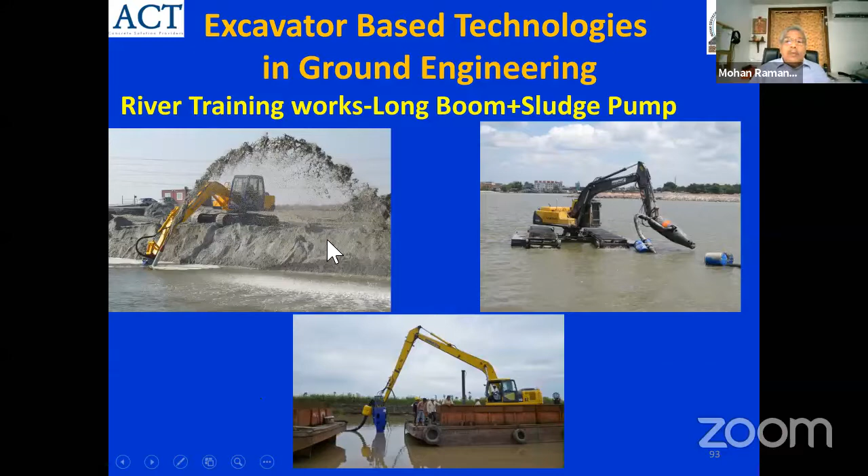Then we come to blast hole drilling, for mining and the geotechnical field. If you want to remove rock, these are all attachments available on excavators for blast hole drilling.

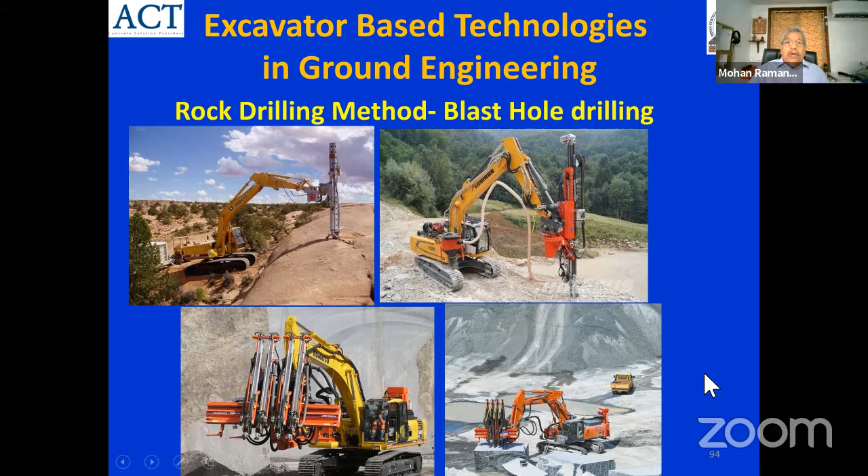Then you also have backfilling. Once you do the pipeline work, you need backfilling, and there are some specialized buckets. These screening buckets are good for backfilling the trenches - it retains the large size particles and puts them directly into the trench.

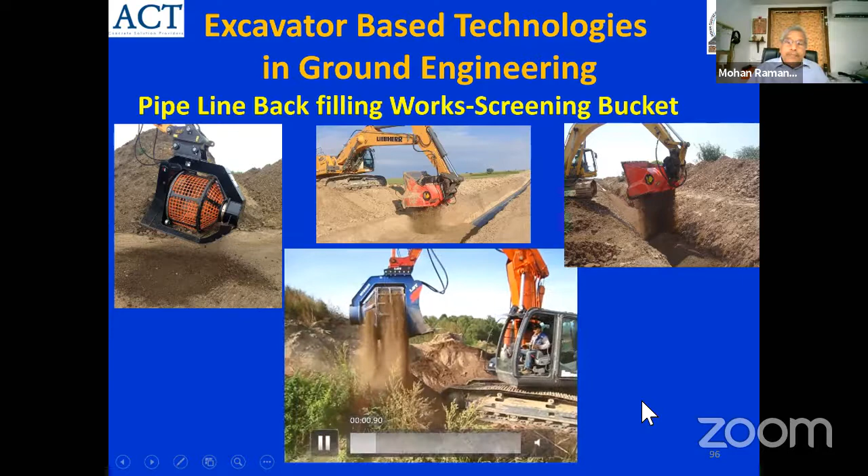Then we have another equipment getting popular after doing piling in our metros and large projects. To break the piles, we have pile crushers. These are equipment that are very good, very productive. Slowly we're getting the use of this in India too.

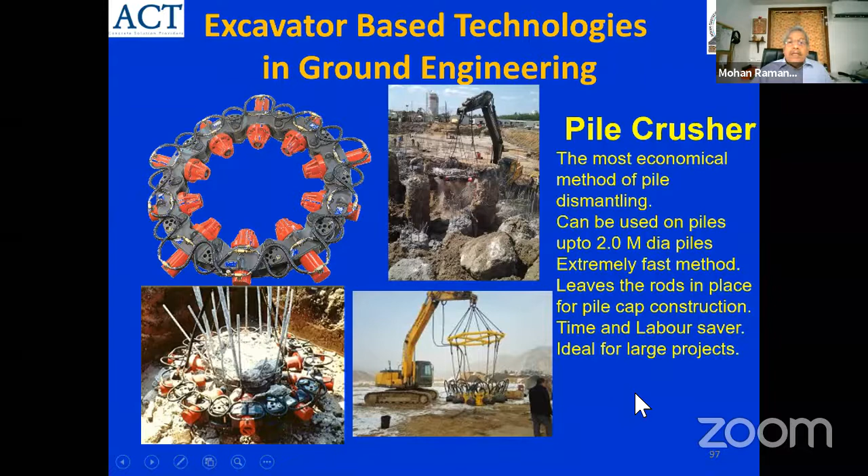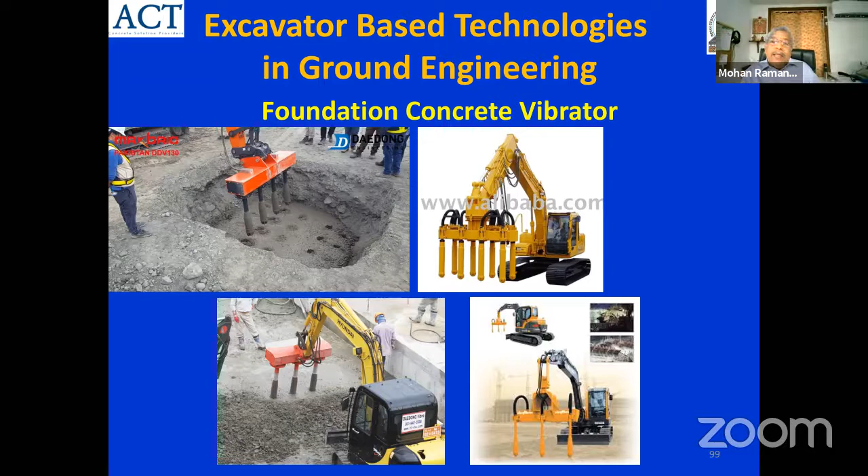The last application is the concrete vibrator, which can be attached for large dam projects and large rafts. Though it's not really geotechnical, rafts and dams are designed by us, geotechnical engineers. These are hydraulic vibrators used for compaction of concrete, and we don't see much of this except in remote dam projects. This could be very good for our rafts in multi-story buildings - our high-rise buildings are going taller, and rafts are almost 3-4 meters deep in Mumbai and other places. So we should start using effective vibrators like this.

So I've come to the conclusion slide.

There are lots of opportunities ahead for selling heavy earth moving machines with suitable attachments to existing and new entrants. We need new entrants, we need more players in ground engineering. There is a constant need to innovate in ground engineering. Unlike other trades, we need to innovate if you want to sustain.

I feel the time is right for the manufacturers to enter the ground engineering applications. R&D and prototype should be supported by academia. Academia have got a great role to play. More young qualified engineers should take to contracting and ground engineering.

Indian demand in ground engineering applications is bound to increase, and all Indian manufacturers are in an advantageous position to participate in this growth. Lastly, as our Prime Minister says, make in India and make for the world, and Atmanirbhar program will support all of you.

And I want to say that as an executive committee member of DFI, we are going to have 3 webinars and a big conference, a virtual conference. Please make note of the date, and this will cover some of the best technologists and academia professors in this webinar. For example, the foundation design engineer for Burj Khalifa, world's tallest building, is going to be there, and many more. Please note the website, you can go on it. I suppose it's okay because it's supported by DFI, IGS, and IIT Madras. I can play the slide again.